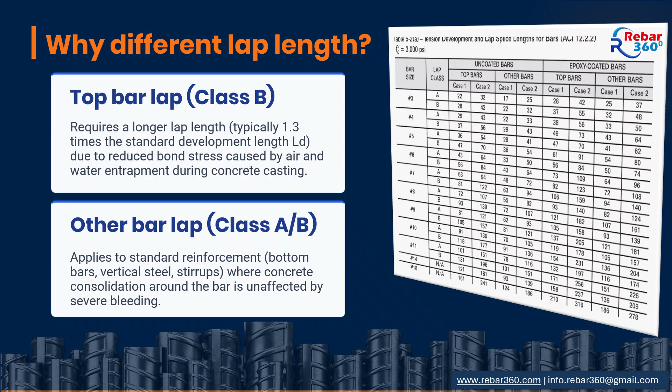Since the bond is slightly weaker, ACI requires a longer lap length to safely transfer the forces from one bar to another. On the other hand, bars that don't experience this condition can use the standard lap length because the concrete surrounds them more effectively. So, the longer lap is not because the steel is different. It's because the bonding condition is different.

Now let's define what ACI considers a top bar. A top bar is not simply a bar placed at the top of a member. This is a common misunderstanding. According to ACI, a top bar is a horizontal reinforcing bar that has more than 12 inches, or 300 millimeters, of fresh concrete cast below it. The important part is the depth of concrete below the bar.

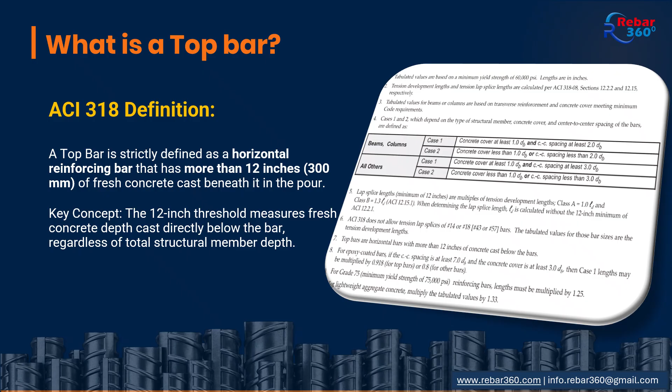Imagine you're pouring a thick raft foundation. If the top reinforcement has more than 12 inches of concrete beneath it during the pour, it becomes a top bar. But if you're working with a thin slab that has only 6 inches of concrete below the top steel, it is not classified as a top bar, even though the reinforcement is located at the top of the slab. So always remember, the classification depends on the concrete depth below the bar, not simply its position.

Here's a simple 3-step method that you can use on any project. First, ask yourself: is the reinforcement horizontal? If the answer is no, then it's not a top bar. Next, check the concrete depth below that bar. Is there more than 12 inches of fresh concrete beneath it during casting? If the answer is no, then use the other bar lap.

If the answer is yes, then the bar qualifies as a top bar, and you should use the top bar lap specified in the structural drawings. Whenever you're unsure, just go through these 3 questions. It's a quick and reliable way to avoid mistakes.

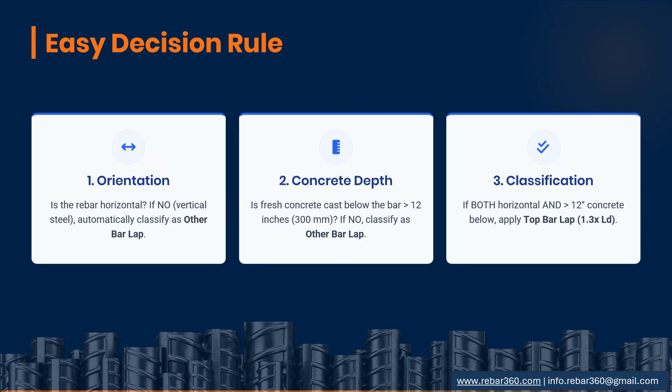Now let's see where we normally encounter top bars in real projects. The first example is a raft foundation. Large mat foundations are usually quite thick, so the top layer of reinforcement often has more than 12 inches of concrete below it. In this case, the top reinforcement is considered a top bar. The second example is deep beams or thick slabs. If the top longitudinal bars have more than 12 inches of concrete beneath them, they also require top bar lap.

The third example is horizontal reinforcement in walls. If the wall is poured from the bottom upward and a horizontal bar has more than 12 inches of fresh concrete below it, that bar also qualifies as a top bar. These are the situations you'll commonly see in US detailing projects.

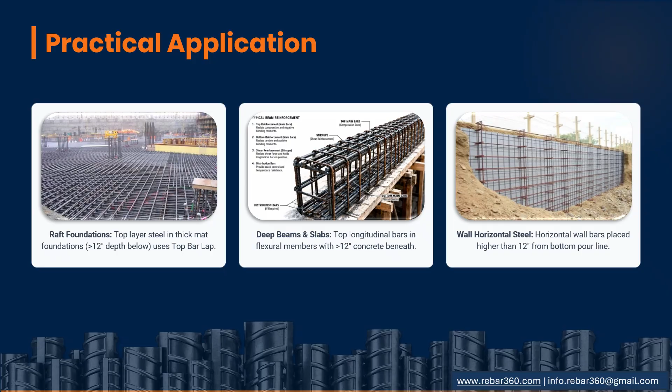Now let's look at where top bar lap should not be used. Column vertical bars are not top bars because they are vertical. Concrete flows around them differently, so the bond reduction caused by bleeding doesn't apply in the same way. The same applies to vertical reinforcement in walls.

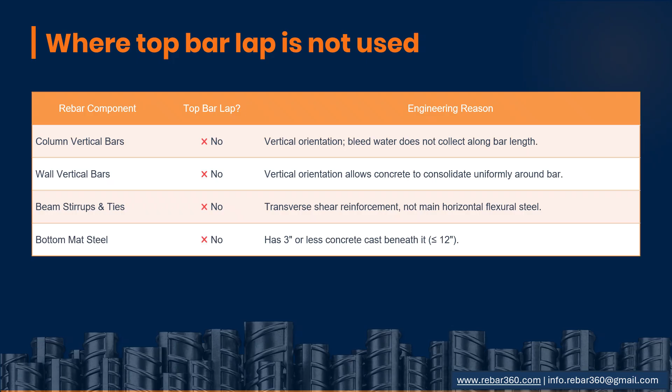Beam stirrups and ties are also excluded because they are transverse reinforcement, not the main horizontal flexural bars. Finally, bottom reinforcement in slabs or foundations is not considered top bar reinforcement because there isn't enough concrete below those bars during casting. Understanding where not to use top bar lap is just as important as knowing where to use it.

This is a very important point for every rebar detailer. Even though ACI provides general rules, every project has its own specifications. Some clients prefer to use top bar lap for all top reinforcement, regardless of the concrete depth. Why? Sometimes they want a conservative design or they follow company standards that go beyond the minimum ACI requirements.

As detailers, our responsibility is to read the structural notes carefully before preparing the shop drawings. If the project specification differs from the general code, always follow the project requirements. Never assume. Always verify.

Let's discuss a few mistakes that are very common among beginners. The first mistake is applying top bar lap to every top reinforcement layer. This increases steel quantity unnecessarily and can lead to higher project costs. The second mistake is ignoring the orientation of the bar. Remember, top bars are horizontal bars. Vertical bars are not classified as top bars.

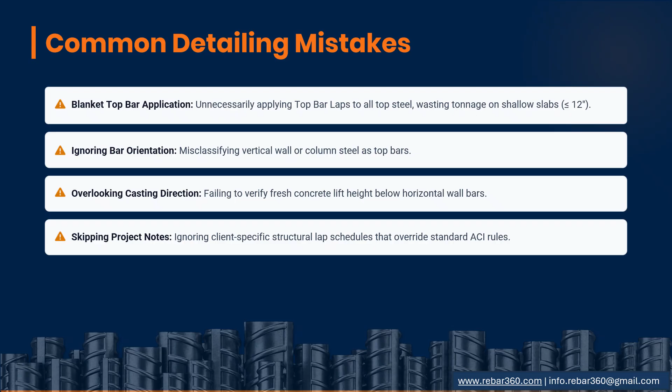Another mistake is forgetting to check the concrete depth below the reinforcement. Many people only look at the drawing without thinking about how the concrete is actually poured. Finally, some detailers skip the structural notes and directly use the standard lap schedule. Always review the project notes before making detailing decisions. These simple checks can save a lot of revisions later.

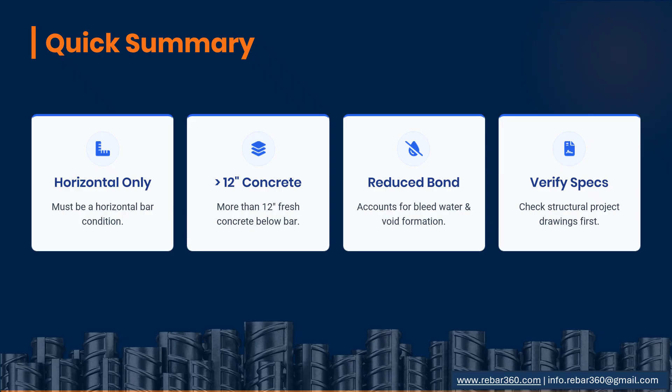Let's quickly review today's concept. A top bar must be a horizontal reinforcing bar. It must have more than 12 inches, or 300 millimeters, of fresh concrete cast below it. Because of concrete bleeding, the bond between steel and concrete is slightly reduced. That's why a longer lap length is required. And finally, before applying any lap length, always check the project specifications and structural notes. If you remember these 4 points, you'll be able to identify top bars confidently on any project.

I'd like to leave you with one important message. Don't just memorize the lap length table. Instead, understand why the code requires a different lap length. When you understand the engineering reason behind the rule, you won't have to depend on memory. You'll be able to analyze any situation and make the correct detailing decision. That's what separates a professional rebar detailer from someone who simply copies information. Always focus on understanding the concept, not just the numbers.

Thank you for watching this video. I hope this explanation helped you understand where top bar lap should be used and, more importantly, why ACI makes this distinction.